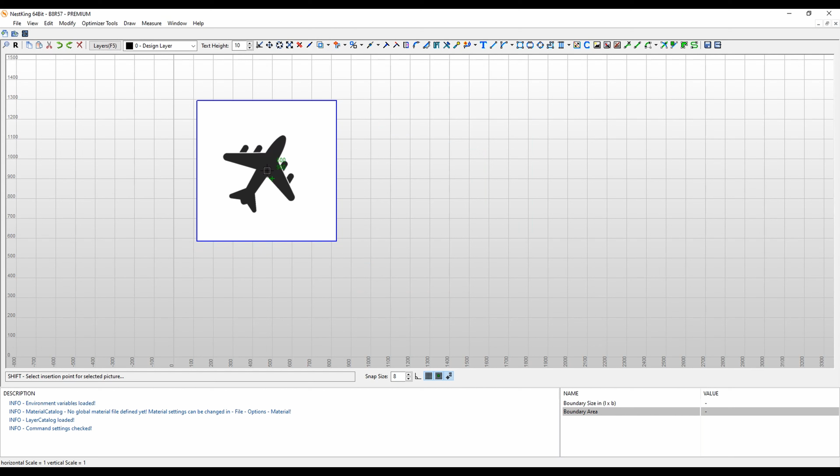Start NestKing, open the sketcher, and get your airplane silhouette ready. I already downloaded something. Load picture, and I'll use this one, which I know is from Adobe Stock. It's a picture you can use for free. Load it into NestKing.

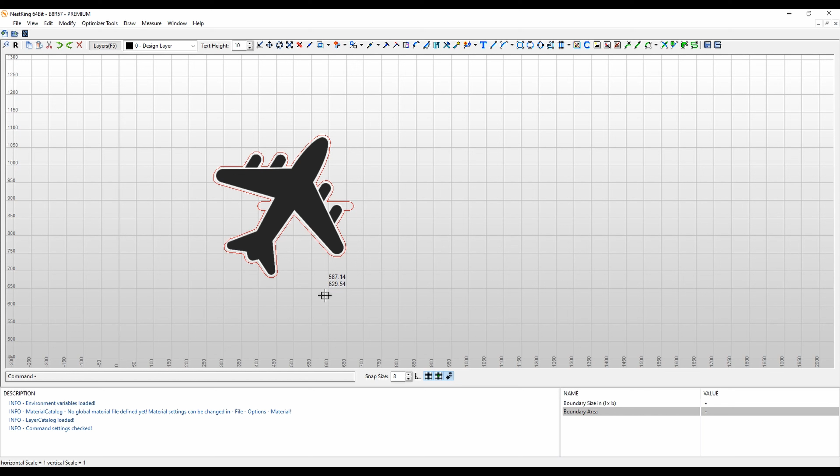Then mark the picture, process image, and I'll just click yes. You see you get the outer geometry, but you also get these grip holes which I don't want. The background of this tool was actually a creation for foam cutouts for tool sets, that's why you get these thumb holes to pick up your tools.

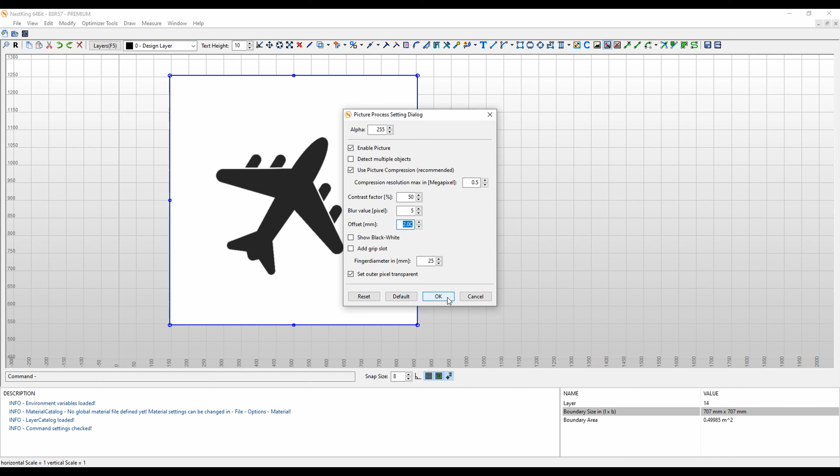Let's go back and repeat the process, but remove this grip slot. I don't care much about the offset, I can reduce this to 2 millimeters because I'll be scaling this later anyway. Now, get geo from picture. Yeah, that is good.

Now I'm going to create a master cut out of this. Master cuts, yes, of course you have to save this. And here we are.

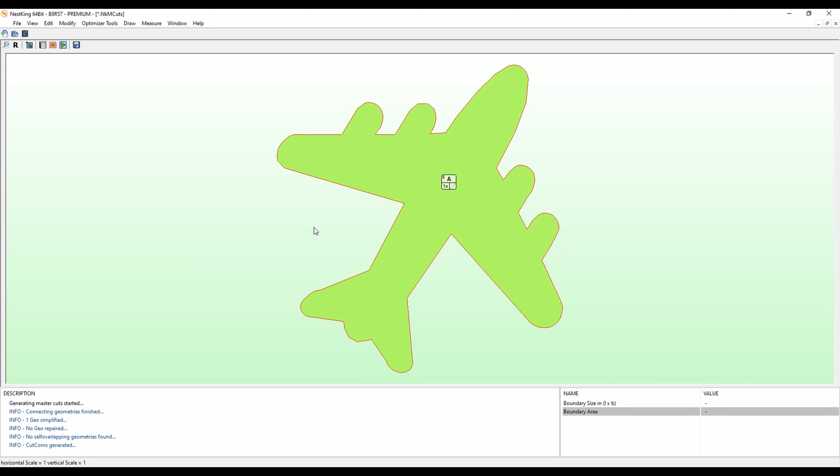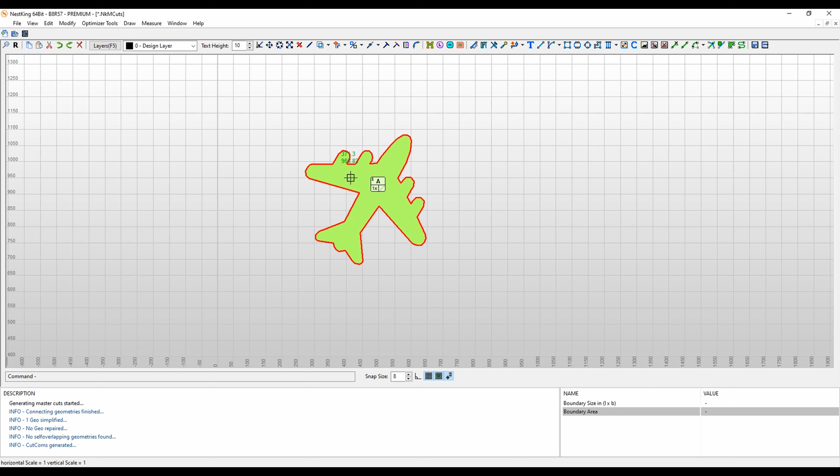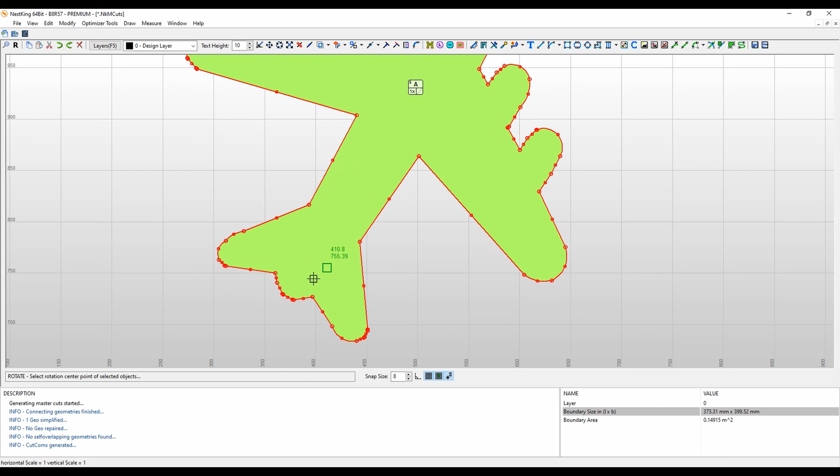Let's see, this is quite large considering the numbers here are in millimeters. So let's bring this down to a meaningful size, like 5 centimeters. Let's do rotation. That sounds about right.

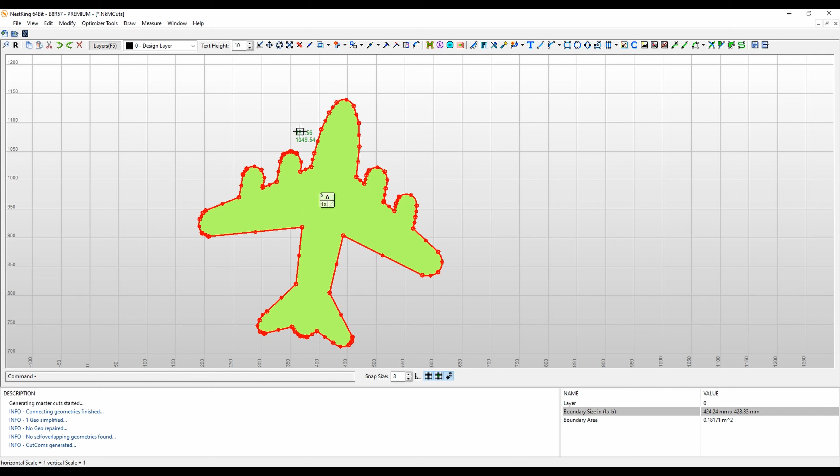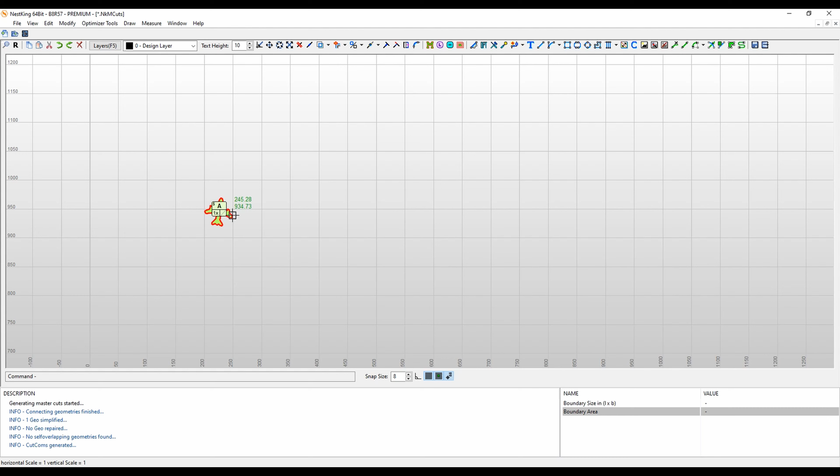Now, I will not be doing the stack for the plate to cut this from. I'll just tell NestKing to nest 100 pieces onto the plates that you can buy.

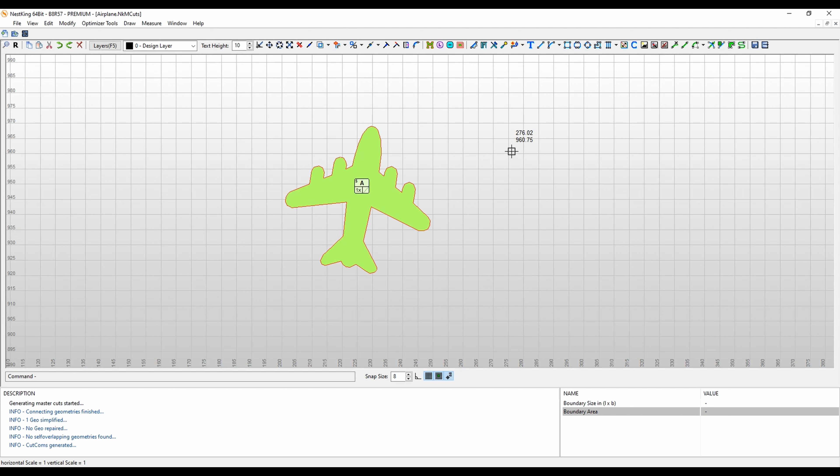Now, how to create 100 pieces out of this? We can simply create the quantity here and put in 1. Let's do a fun thing, 200.

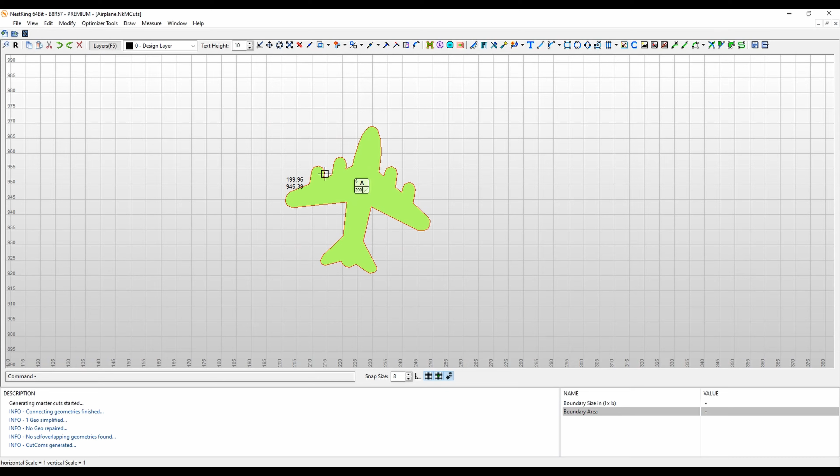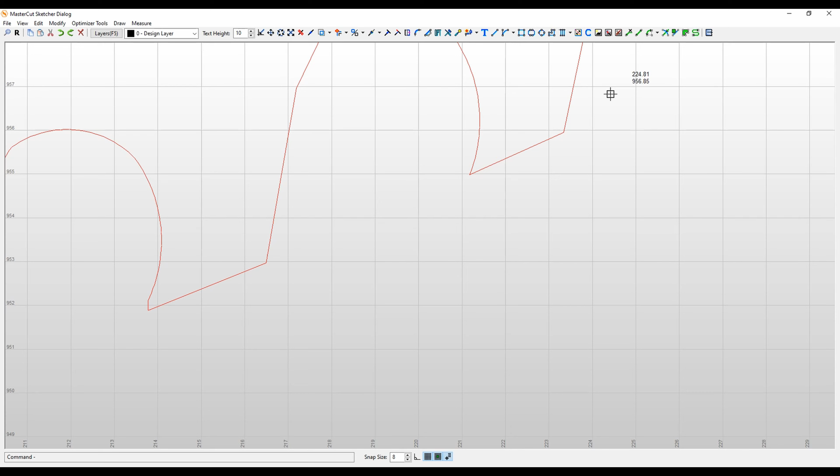Of course, we could modify the master cut a little bit by entering, making these areas nicer, but let's keep this for a later step. We can do this anytime later on.

Now you see that we have here 200 pieces of this patch A, no mirroring, and it's step A. Let's create the master cut output. We have this 200 times. Let's do the nesting.

Yes, it doesn't matter what material you select, because the only thing I am interested in is user-defined area. So let's say you buy a plate which has a width of 500 millimeters and is 1 meter long. Will it fit?

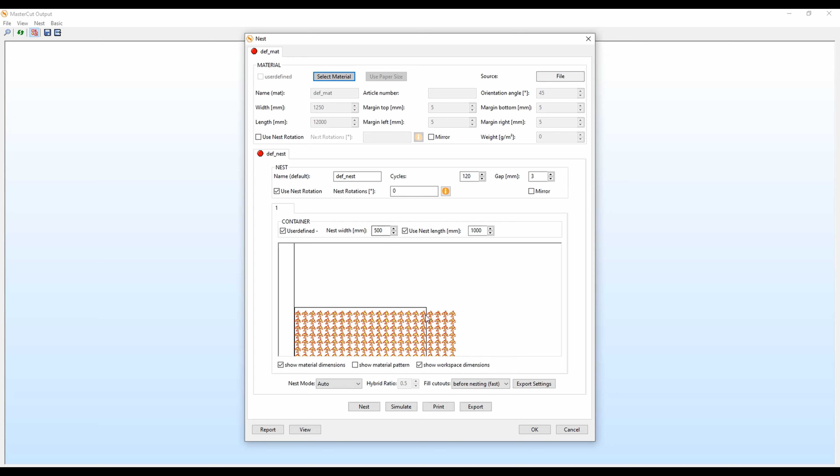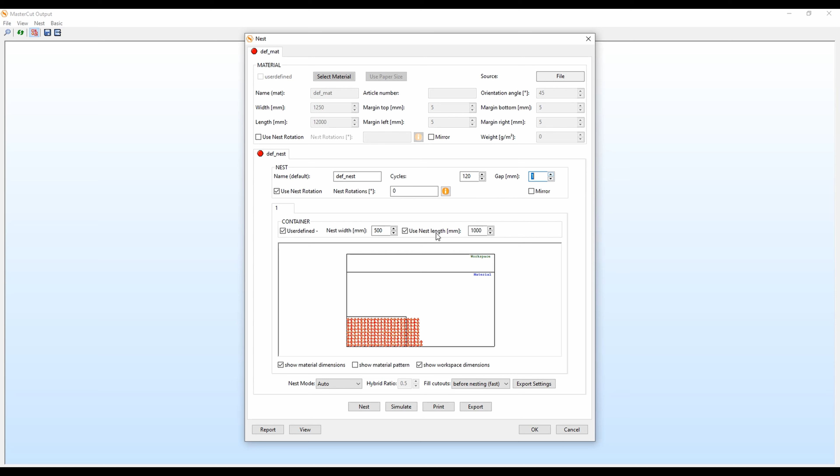No, you see that it will likely not fit like this. Let's see what the nesting algorithm can do here. Let's keep the gap to a minimum of 1 millimeter. Water jet cutting should be fine with this, and later on we will anyway get rid of the burrs and edges. Nest.

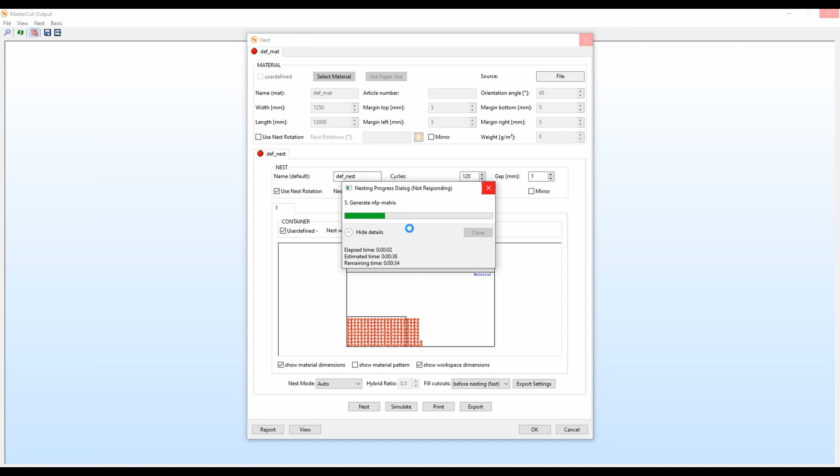This can take some while. And here we are - NestKing actually nested nicely everything so far. We kept the original orientation. Actually, I'm happy with the result. Let's skip this step, I don't need to go into further details.

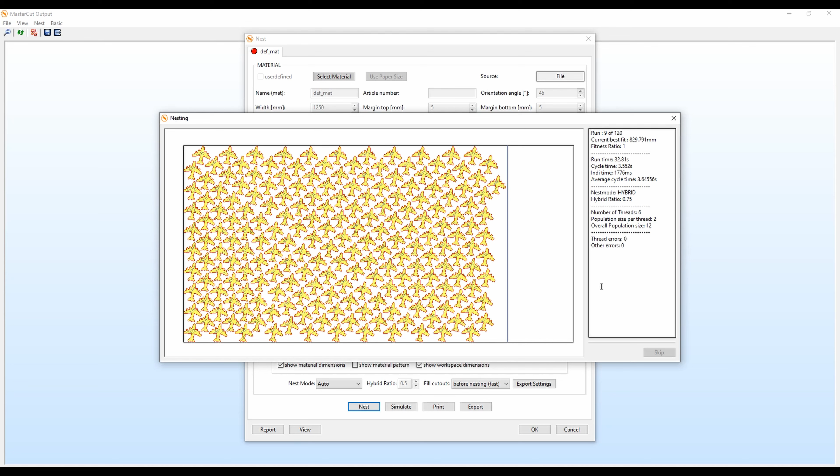So here, with this, we can create 200 little keychains. Now the result is nice, it actually fits into the material specified.

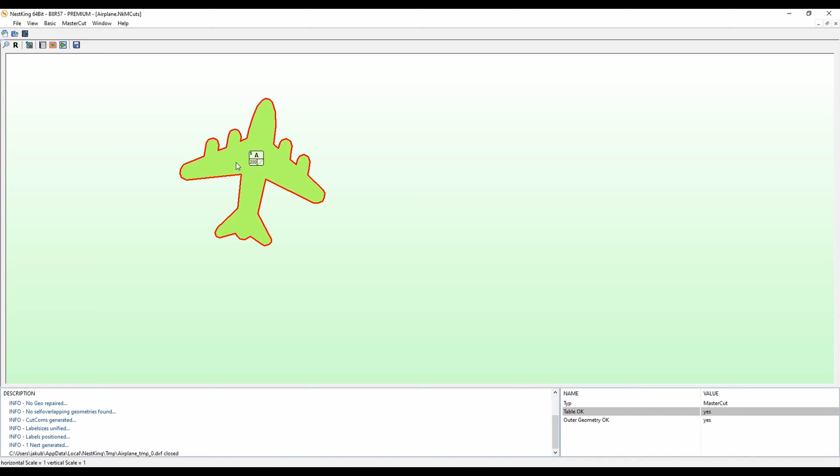Okay, let's go and do some changes. Let's go back. First of all, we need a true hole here. So what we are going to do is modify MasterCut and enter a hole.

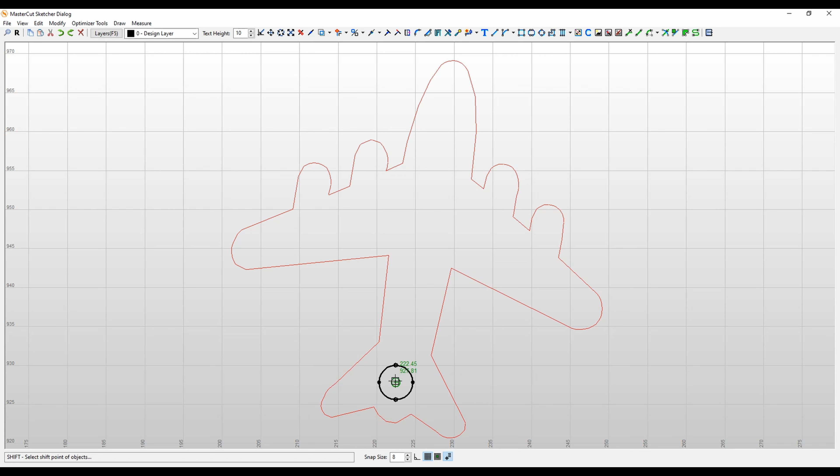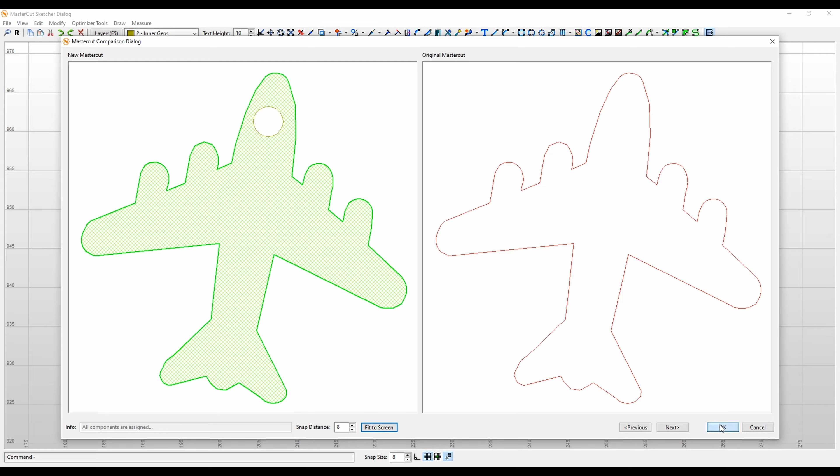Actually, I find this to be nicer when it is on the nose. Here. Of course, this needs to be put to the correct geometry, inner geometry. It will ask you about edit geometry, whether you want to transfer properties. It's fine to transfer the outer properties because there is nothing for the inner hole to be transferred. And okay.

Now, one more thing. On the default material here, nest rotations, 360. So this can now nest 360 degrees in any direction.

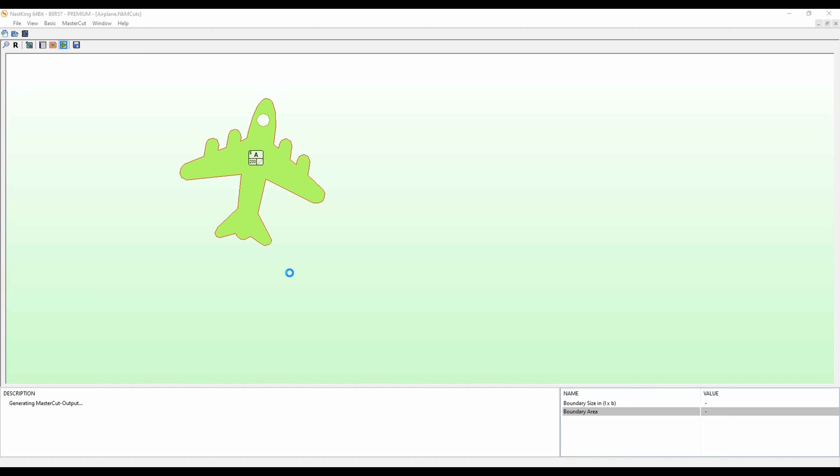Let's see if we can get an even better nesting output. Nest. Of course, we could have added the nest rotations also in this dialog.

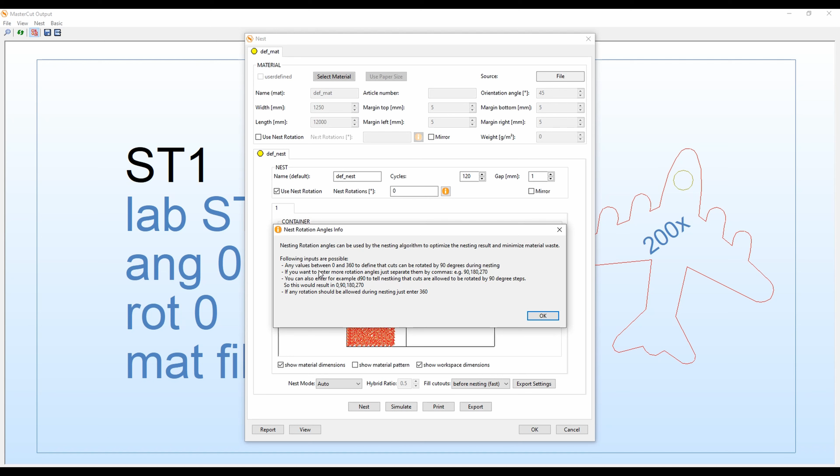The mirroring doesn't matter.

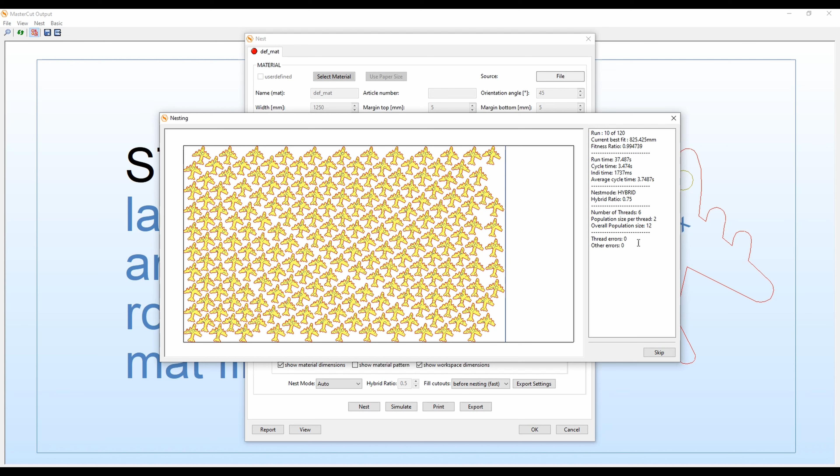Okay, the nest rotations are not going to improve the results anymore. And since I'm quite happy with the result and don't really want to wait the 120 cycles, I'll continue - this looks already very good. I'm going to skip this and just quit, keeping the result as it is here.

Okay, and it is time to end. You see, we have created very quickly 200 of these airplanes.

And now coming to an end, I'd like to remind you that you can use this picture processing tool also for reverse engineering. You can fill your material into your mold, take it out, create a picture, and then scale it down to whatever you see fit. You can also put something of known size next to the picture, and then you know exactly how to scale it on your computer and continue processing.